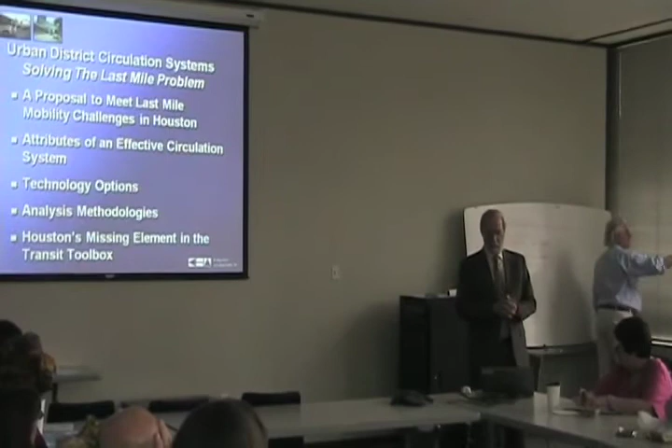Thank you, David. As you said, I've got way too much material, so I'm going to go fast, and I'll probably skip some stuff. When we first started talking, I sent him some technical papers I presented about some analytical work a few months ago, and asked if this is material they'd be interested in. He said, well, they probably would. Unfortunately, that's probably the stuff I'm going to skip today, because the other stuff I think is more important for this forum. If we have time, we'll see.

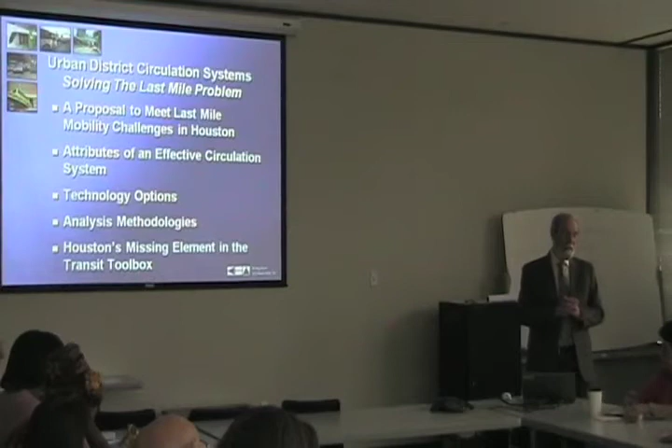David's going to be my timekeeper. But I'm going to talk through these things with regard to what we're calling the last-mile issue. Now let me warn you, those of you dealing with urban districts where the street system's working well and circulator buses are the solution—I'm not talking about that. I'm talking about the problem we have brewing that we're not addressing in our very dense urban districts. But we'll go through all that.

First of all, this is a proposal for this city in some of our most serious conditions, as I look out into the future.

We have urban districts in very close proximity to each other—this is Texas Medical Center and downtown in the distance—that are some of the densest in the country. And we are not thinking ahead enough on how we're going to move people around within those districts.

We are starting to think about how we get people to the districts in large quantities, but we're not yet thinking about how we move them around within the districts. In fact, in basically a 4-mile radius, we have 4 major business districts, and each of these, if they were a central business district, would rank in the top 15 in the country. We have 4 of them within a 4-mile radius of each other.

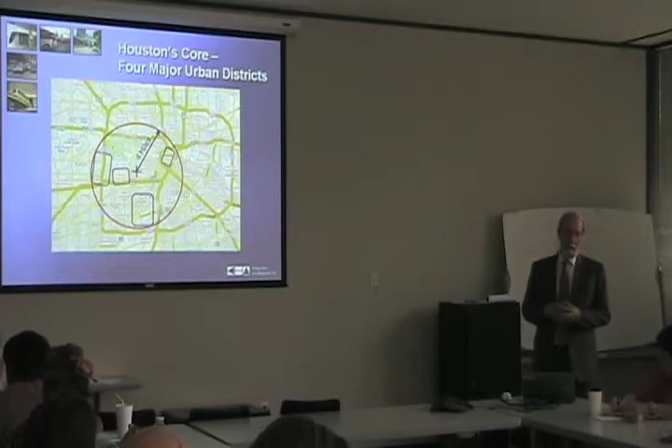Even the parts that are brand new. I know because I live right here, and the parts we just finished rebuilding, at peak hours we're already back at level of service F, cascaded all the way back through the system. And that surrounds these urban districts.

We must use transit to even get people to those districts, and we are taking some baby steps towards that. Some of the rail technology being discussed—long-distance commuter rail that would bring large trains into the core of the city—has a lot of issues and unsolved problems in how to do that.

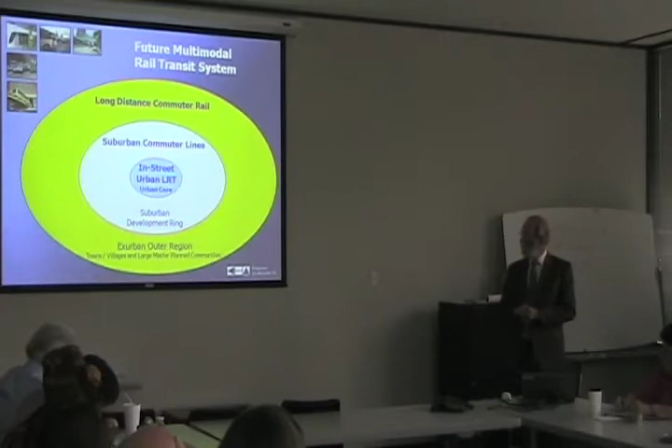Suburban commuter lines—Metro is now talking much more openly about extending light rail systems, or light rail type systems, on rail lines out from the city. And then we have the beginnings, and we're starting to design the additional lines for our in-street urban light rail system. But all of these are only part of the answer.

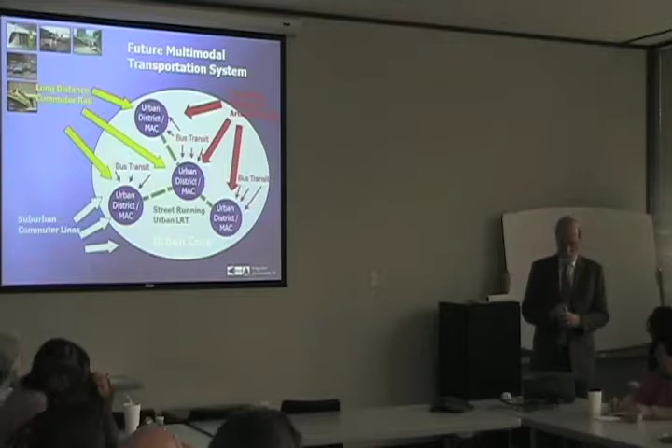Because as these systems bring people into the urban core, and as they begin to have access to the urban districts, or at least close proximity to them, it doesn't solve the issues about how you move people around inside.

There will be a new dynamic when things like long-distance commuter rail with large trains start to operate, because there will be a large quantity of people getting off those trains. Once our system matures over a number of years, I believe we're going to have locations where multiple trains arrive within a few minutes of each other, coming from different parts of the city.

And how we move people inside the urban districts is going to be a huge challenge. In addition, as parking becomes more complicated, as pricing goes up, as the value of property increases, and there's more thought about better ways to use that land than maybe parking structures, perimeter parking around urban districts is going to become, I believe, part of the solution.

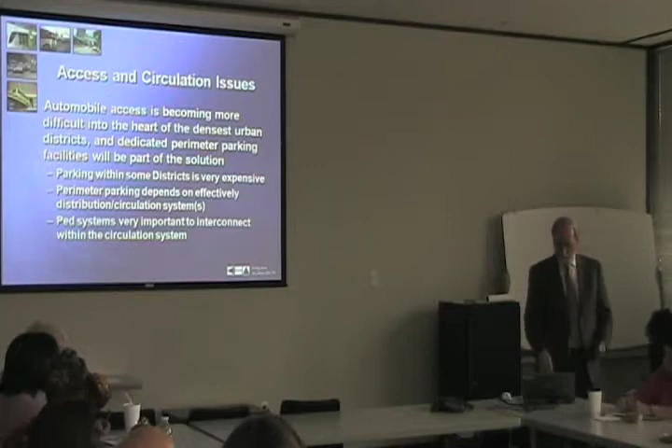And how you move people from those perimeter parking areas to the core is a critical part.

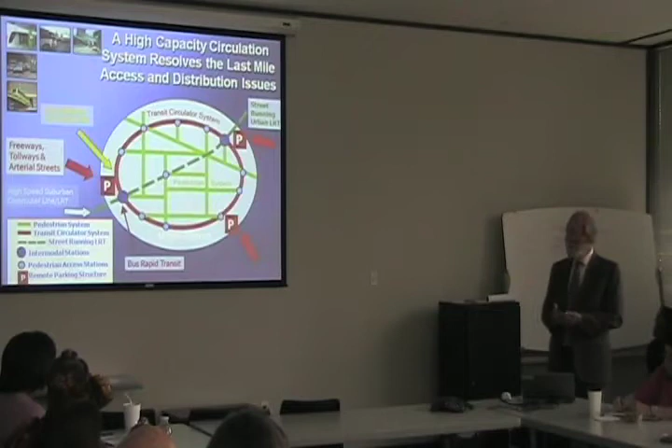You have light rail systems that might go through the middle, some bringing people long distances so the trains are already full when they get to the urban district. You have bus rapid transit, which is going to become a new part of our portfolio. And then I believe what's missing is we haven't yet addressed the circulation systems internally that can be complementary to the pedestrian systems.

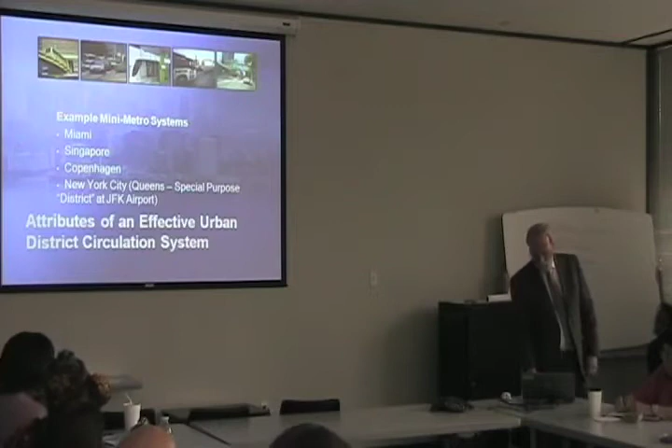Let me show you some examples of what I'm talking about. These are systems that in prior presentations, like the Metro Technology Forum, I call mini metro systems—I'll explain why as we go through. It is a fully automated, driverless system, and there's a reason for that. It can be used either in corridor service or circulator service in urban districts.

It generally has a moderate capacity range on the scale I'm talking about of 10 to 15,000 people per hour per direction, which is freeway equivalency. And it's very flexible in its alignment.

It has a smaller envelope, it handles steeper grades, turning radius, and the like. The propulsion and suspension systems can be just about anything, and I'll show you some examples. They might be rubber tire, like the Paris Metro, or they might be steel wheel.

The vehicles are smaller. They operate in short trains, often as close as 1-minute headways. The reason you can do that cost effectively is when you're fully automated, you don't have a driver on every train. So you can carry just as many people by running short, small trains on close headways. But that dramatically reduces the civil cost of your stations and your guideway structures.

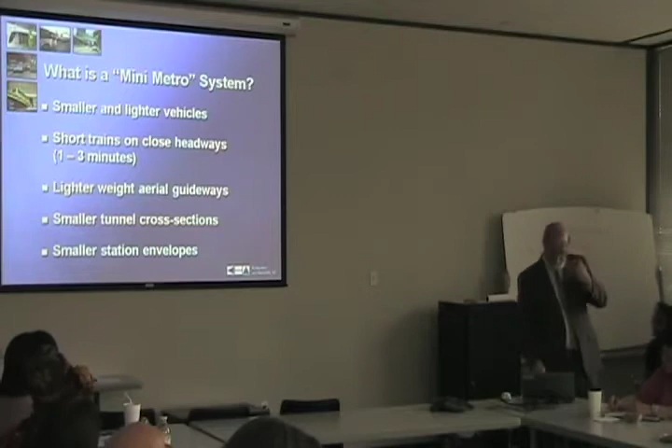Let me show you some examples. Miami, 20-plus years ago, when the federal government was investing in advanced technology—they haven't really since, although there's inklings of it again—this was one of the few systems that was built. It's in downtown Miami, and in '94 there were some extensions to the line that I worked on, so I became more familiar with it.

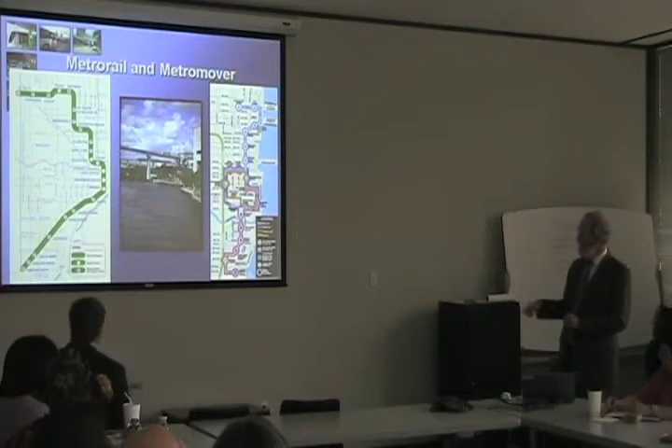Here is the Metro rail system on the left that goes out some distance. There's considerable work underway to look at expanding that. On the right is a graphic showing the central loop of downtown, which was the original one, and then the northern extension, generally called the Omni extension because of what was the Omni Mall up towards the north end, and then the Brickell district going to the south, now generally called the financial district.

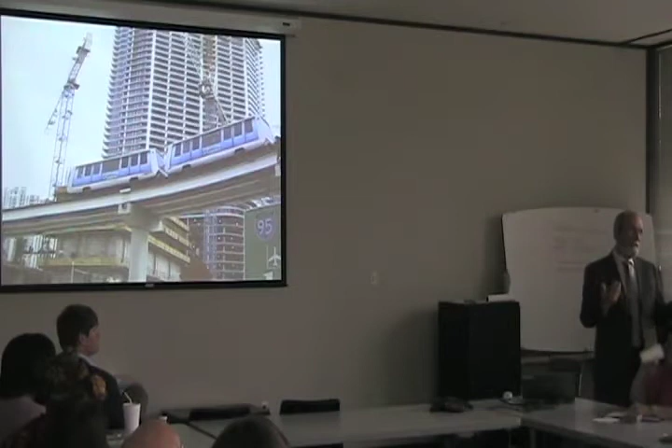I'll show you some examples of how that is developing. In fact, when I was there a year or so ago, I took my camera, and it's amazing the development and construction that's happening around the system in downtown Miami. There's been a lot of talk about the new urban energy happening in downtown Miami. Here's another shot of the system with all kinds of skyrise development going on around it.

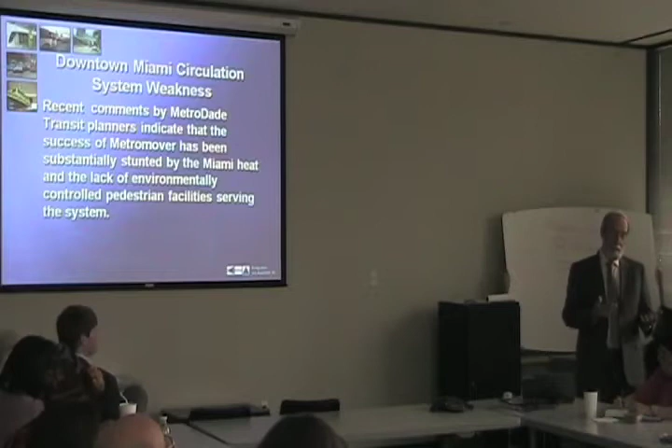This is just restating what I said. The one problem that's been noted, as I've been asking my associates in Miami to stay in touch with Miami-Dade Transit, is that they don't have environmentally protected ways in Miami's climate like Houston does to move around. So that's one of their weaknesses.

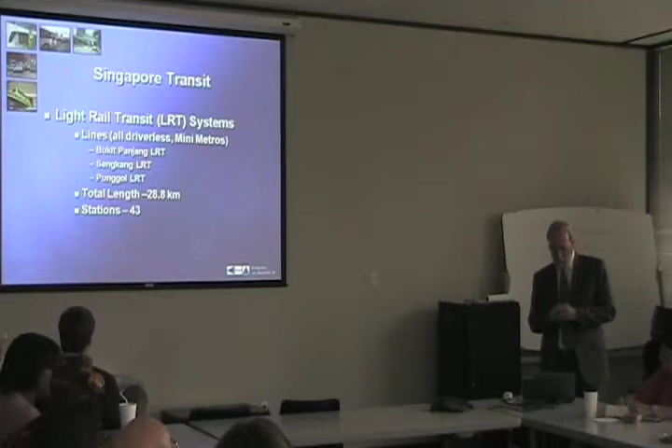The three lines I'm referring to are three different districts that have what they call light rail systems, but they are fully automated, in my term, mini metro systems. And there are, as you can see, quite a length and a number of stations.

You do not need a car to live in Singapore. It is a city that's been built for that purpose. They've integrated all of this circulation system into the urban context. It provides you the ability to get around and connect to all the other transit modes.

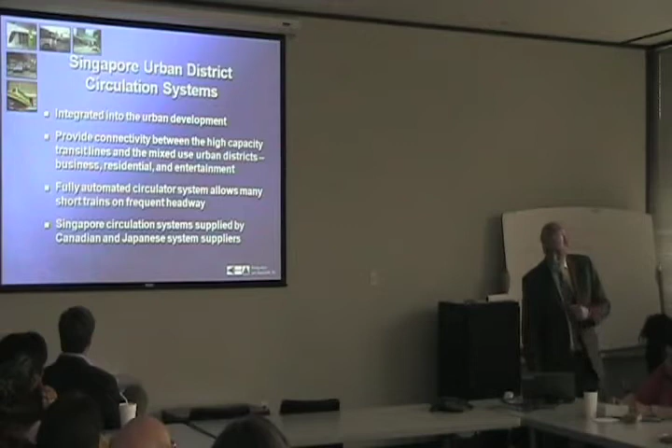Currently, the two suppliers that have been active there, I believe, are just Bombardier and Mitsubishi. This is a Mitsubishi car in one of those urban districts. They call it the Crystal Mover.

There are now several Crystal Mover systems going in here in the U.S., mostly in airports, only in airports at this point. But it's an attractive car. It's running in one-car trains here. Here's another view.

This is a seismic zone. Obviously, guideway structures get bigger. There are ways - Steve Clark over there has associates in his firm that have really developed a lot of expertise in how to compact the mass of guideways by integrating some of the structural elements a little differently than they did here. But it is integrated with the urban system.

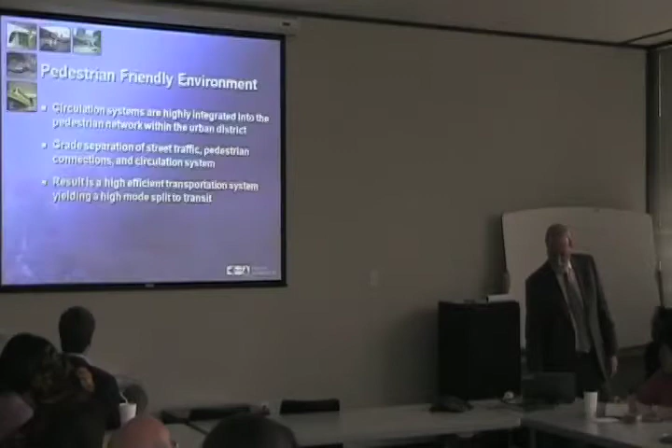It also has pedestrian-friendly characteristics. Circulation systems need to be integrated with pedestrian facilities, because it's the pedestrian facilities that really get you the last, if not the last mile, the last few hundred yards. Usually in environments like ours, which is the focus, there needs to be consideration of how those pedestrian systems can be grade separated in some of the densest areas, and also weather protected as much as possible.

Another case study that's very intriguing is in Copenhagen. This was not a compact urban district where there is, you might say, a circular circulation system, but it was a linear urban district that was created around the transit system.

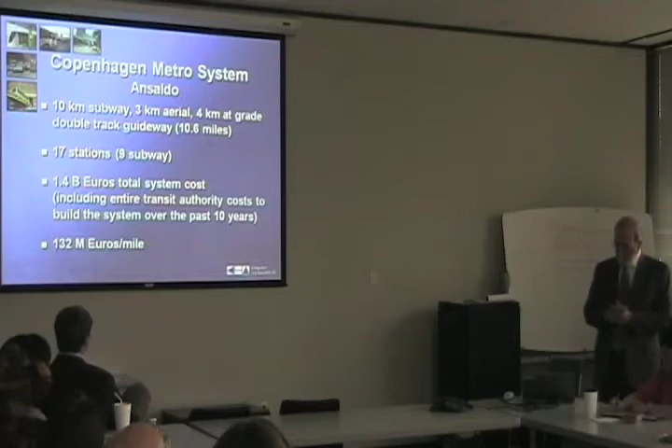In fact, the creation of this urban district was what fueled the funding to build the system. They created a company, and for many years, the transit authority was this company.

Here you can see a shot from one of the stations. They built the system before most of the stuff was there. And here is the view looking out into the open land.

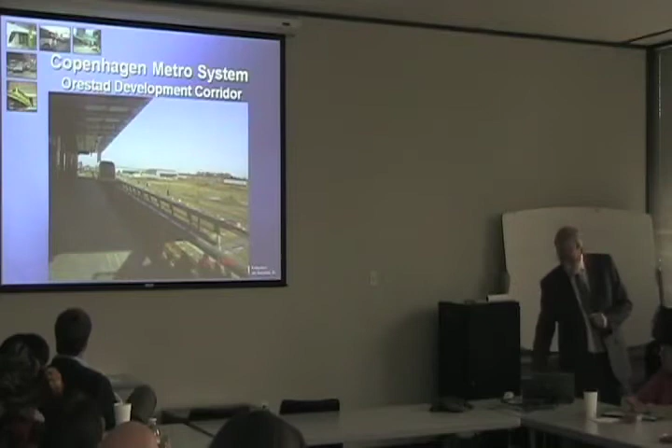Some of it was in place. On the left there was a big department store, shopping mall. On the right you can see there's a lot of open land under construction, and there's actually a station here somewhere right in here, I believe, is the station.

Again, more shots of the open land. The stations are small and compact because the trains are small. And you can do that with fully automated systems.

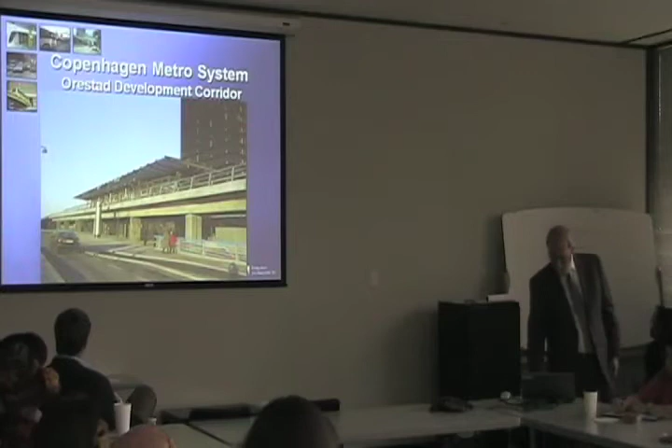This particular design is a nice design by Ansaldo. It's a rail car, pretty conventional rail car, but it's a walkthrough. And I was very impressed by the technology that was applied.

Another shot of one of the stations. This is one of the subway elements. As they get into the old town, out of this corridor I'm talking about, they go subway because of all of the very, very old buildings there. And these are some of the smallest subway stations I have ever seen.

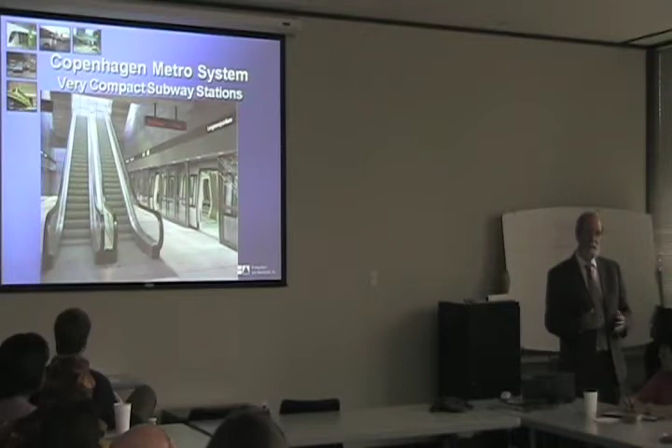But that translates into many dollars saved.

Another one that some of you may be more familiar with because it's in New York is what I call the Airport District Circulator System, or as the Port Authority calls it, the air train. That is the JFK AirTrain as compared to the Newark air train.

This is a rail car built by Bombardier. There are a number of systems around the world and they're marketing it aggressively. It's actually a linear induction motor propulsion, which means it doesn't have to worry about traction between the steel wheels and the steel rails, but they can do conventional switching and things like that. A very impressive system. It doesn't carry a whole lot of riders, but it was still a fundamentally important investment for the Port Authority to make.

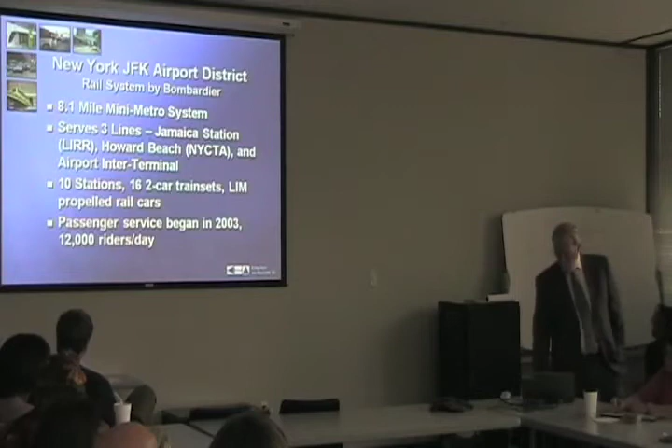Now it's over 8 miles long. The reason is because it stretches all the way out to Jamaica Station, which is the main intermodal connection point for Long Island Railroad. It's also served by a New York City Transit Authority subway. The other branch of the line goes over to Howard Beach, and there is a transit line over there that connects in with the metro system in New York City. This particular line connects those and also carries people to various facilities on the land side and interconnection between the airside terminals.

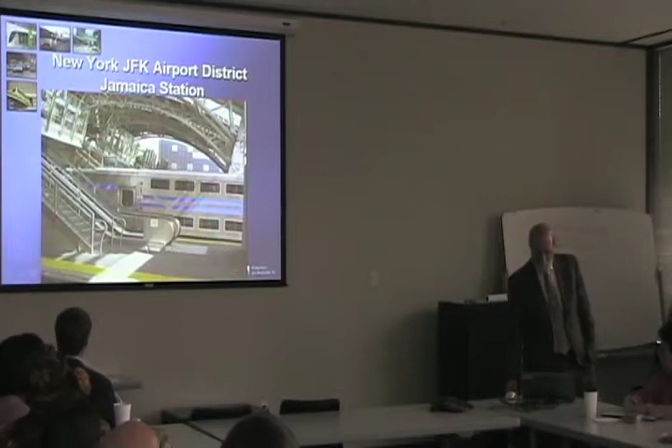Another shot of this train as it's sitting in one of the stations. Now, if we were to be coming from Manhattan to go to JFK, we would arrive on a commuter rail train like this in a newly refurbished Jamaica Station. The Port Authority took the lead in rebuilding that station, very nice architecturally. You go up escalators to this concourse, walk across all of the platforms, of which there are many at that station, down a hallway to connect to the JFK AirTrain.

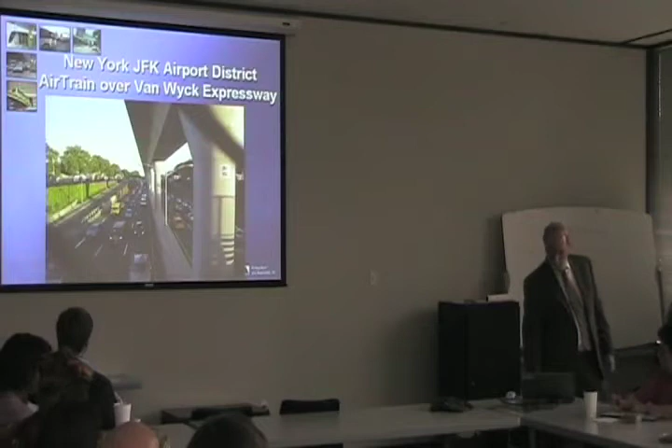When we get on that train, we would travel down the middle of the Van Wyck Expressway. This is the very reason why they built this train, because that expressway doesn't look anything like that most of the time. There was no way to get people effectively from the main hub of the transportation system at Jamaica Station into Kennedy Airport, and getting there by car was an incredible nightmare. We will get there someday. We're not to that point yet.

What about pedestrian connections? Making pretty good time, David. I think we'll be okay.

Pedestrian-friendly environment. I was trying to remember, David, what the guy that spoke on pedestrian stuff a few months ago used, but he had rankings of friendliness for pedestrians. Yeah, I couldn't remember to put them in there.

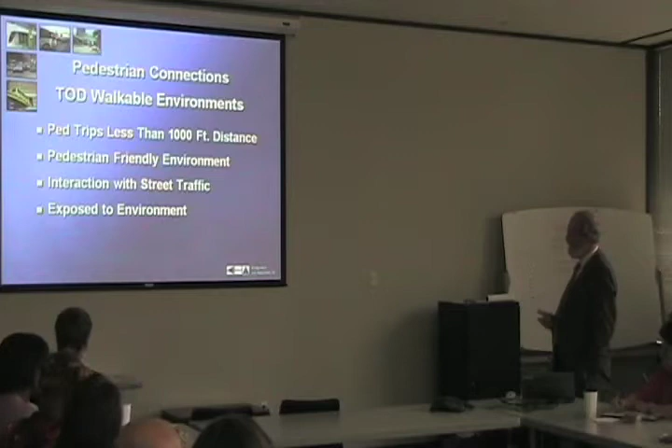But here you're involved with interaction with street traffic. You're exposed to the environment. It can be a testy environment at times. We have some nice conditions of this downtown. I didn't have a photo that shows all the restaurants and stuff, which would have been better. But there are some nice pedestrian facilities along our light rail system in downtown, as an example.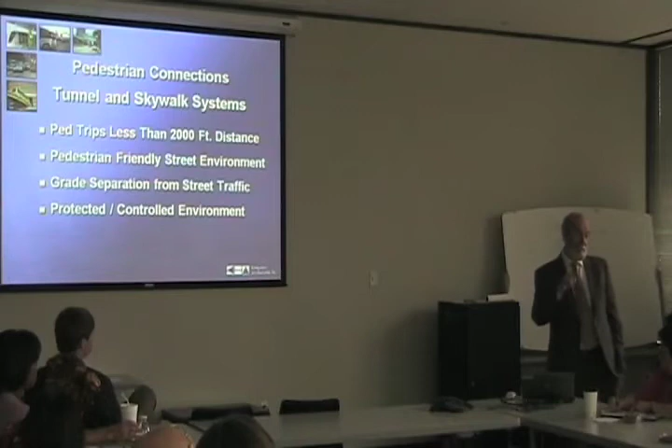But then you can go to the next level, which is tunnel and skywalk systems. We're very familiar with that in Houston. Generally, I still think pedestrian trips, most of us would be reluctant to go much more than half a mile, maybe if we needed to, but usually this type of system isn't well suited for going much further than that. Grade separation from street traffic is a huge plus, and protection from inclement weather, a controlled environment, is another huge plus. In our urban districts, the densest ones, over time that's going to be absolutely essential.

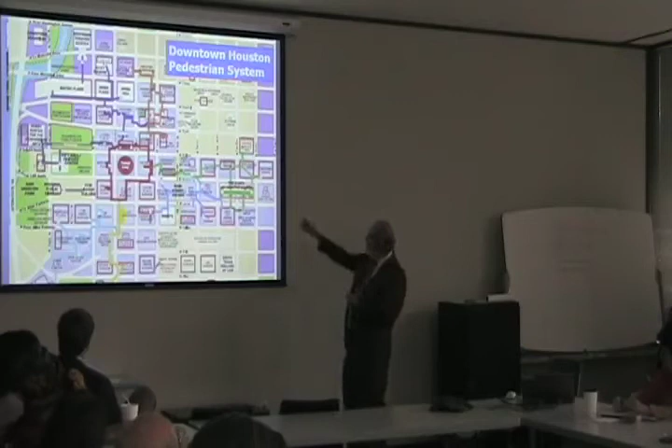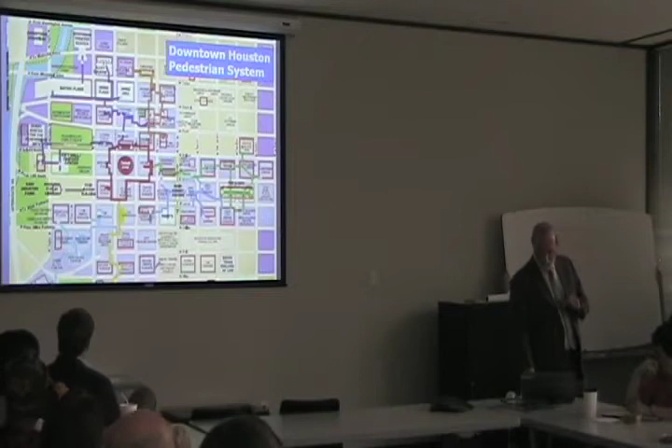This is downtown Houston. You can see in the color coding, if you haven't seen this before, this is impressive. There's quite a network of underground and some above-ground pedestrian connections. But I dare say very few people would choose to go from Houston Center over to Allen Center via that network, because it's a long way and not a straight shot. But it works, it works very well. Unless you've worked downtown, myself included, I don't really understand it - I get lost very easily. But it's an important element. This is the kind of thing that can bring to completion what we need to do.

Now there's another element that I think can take us to the next level. It's brand new - Steve's nodding his head over there because his company is working with some of the suppliers on this guideway design. It's generally called personal rapid transit. For 30 years we've talked about it. If this were a room full of hardcore transit engineers, you'd all be rolling your eyes because you've heard about this for 30 years and it hasn't happened. But there are currently 3 developers with real hardware that's either in implementation now in projects or in full test track mode, and this will be real very soon.

One system within a few months. What it is, is a small personal-size system, at least in pure concept of PRT, where you get on board - it's your vehicle - and it goes from where you got on, you tell it where you want to go, and it doesn't stop until it gets to your station. Very convenient - it's basically a fully automated taxi.

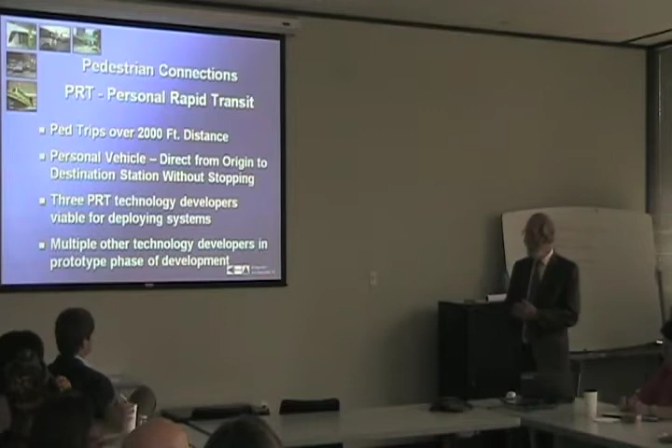And there are multiple other developers working now. In fact, there was a fellow from Austin that called me the other day - did he make it? He was saying he might come. That has at least a PRT-like development he's working on. His or all of them? All of them are fully automated.

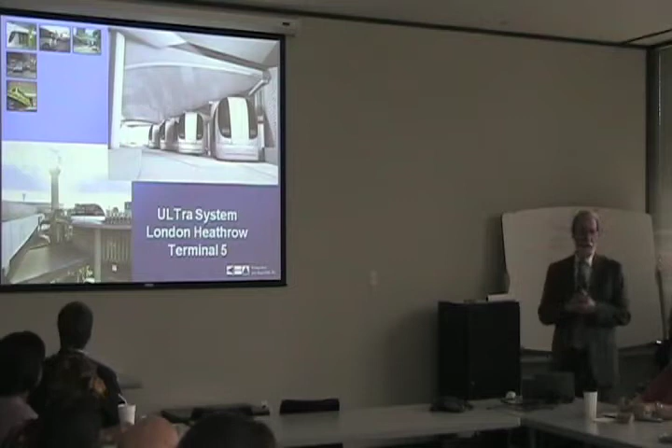Here's one called ULTra, built by a company called ATS - I think that's Advanced Transport Systems Limited, based in Bristol, England. Note that the vehicles are very small, therefore the guideways are very light. In fact, that particular guideway is on their test track, and I think they erected multiple spans in a few hours or something like that. The erection at their first project, Heathrow Airport, was also very quick. You can see the guideway on the left there. It's actually a retrofit, because the airport was designed and the structures substantially built when they decided to put the ULTra system in. So they've actually taken one level of the parking garage and converted it into the station at the terminal - that's very interesting. We'll all be watching closely - you'll probably see news reports over the next few months as they come online, if you haven't already.

Analysis methodologies. If you're not asleep, this may put you there, but there are a few of you that may be interested in the room.

When you're dealing with multimodal elements in a dense urban environment, you have to be able to analyze all the modes and their interaction with each other together. For example, these are some of the types of systems, facilities, or modes that need to be understood and addressed if you're going to be designing how to bring all these different technologies and modes together.

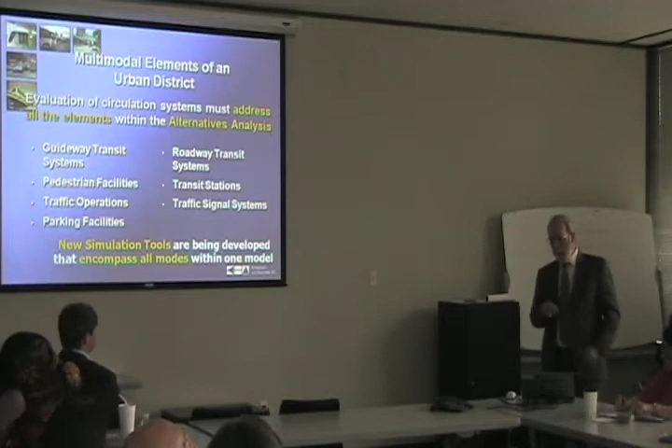We have been developing simulation tools. There's a little bit of an advertisement here. I'm sorry, it's just that I'm going to talk about our methodology a little bit.

Part of what you have to be able to do is study the choices people make within an urban district. In the region, we have huge models used to estimate mode split, as it's called—how many people choose to ride a train versus drive on the freeway. Within an urban district, it gets a lot more complicated, because things like how far you have to walk, how many level changes you have to make, how long you have to wait for the train, how much it costs to park in this location versus that location are all aspects you consider when deciding whether to get my car out of parking and drive across downtown to lunch or a meeting, or walk through the tunnel system all the way there, or go downstairs and get up to that fancy new automated system they just built and ride it around to the other side.

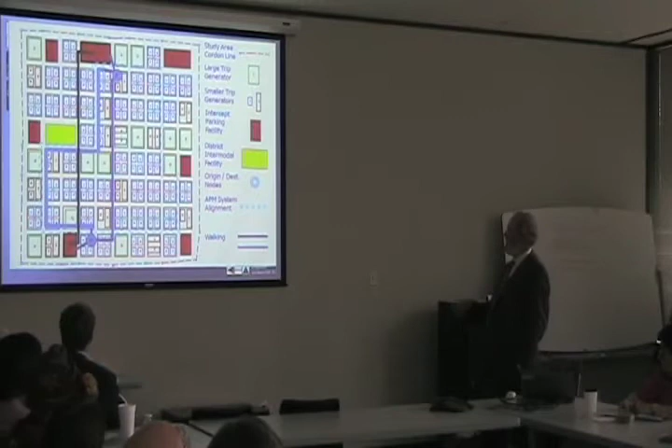This is a marginal graphic—I do some of these on my own, so it's not very good, but it shows some competing path choices. The purple represents what if I walked across downtown. The black is what if I got my car out of parking and drove over there. And the blue is what if I got on the new Circulator system and rode around several station stops to get off. You have to be able to analyze these types of competing paths and do appropriate modal choice.

Our software is called ALTPS, the Advanced Land Transportation Performance Simulation. We built it around this approach because we are preparing ourselves to do this kind of job in our planning and engineering. For example, in a given model—this is a very old one we did years ago at Texas Medical Center—it shows that in a given trip assignment, a path assignment, there's an automobile component, a parking component that may have a cost associated with it, a transit component, and a pedestrian component, all of which have to be embraced as you study this type of dense environment.

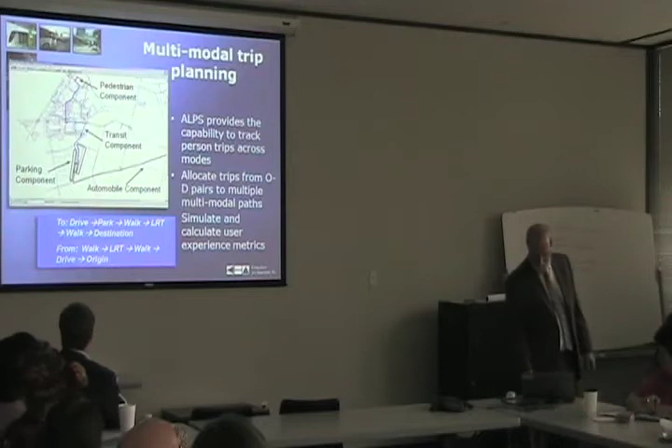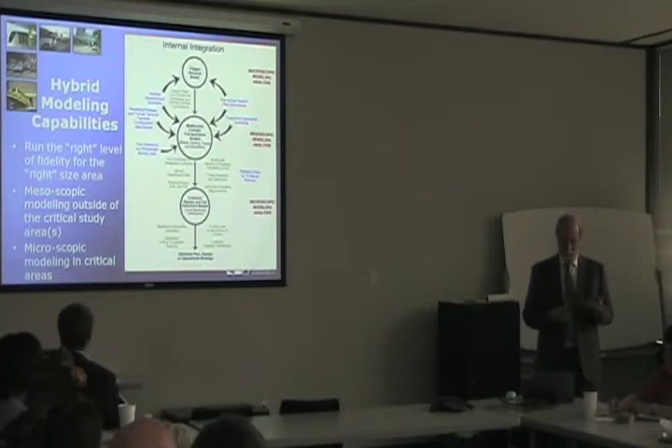I'm not going to go into what macroscopic, mesoscopic, and microscopic means. Some of you know, because HGAC, the guys on this floor, are trying to embrace some of that. But there's great usefulness in being able to use all of those different elements in the analytical process. What we're developing that I'm excited about is we're able to do hybrids, where part of the model runs in one type of processing and part in another. But that's getting too geeky, so I'm going to stop.

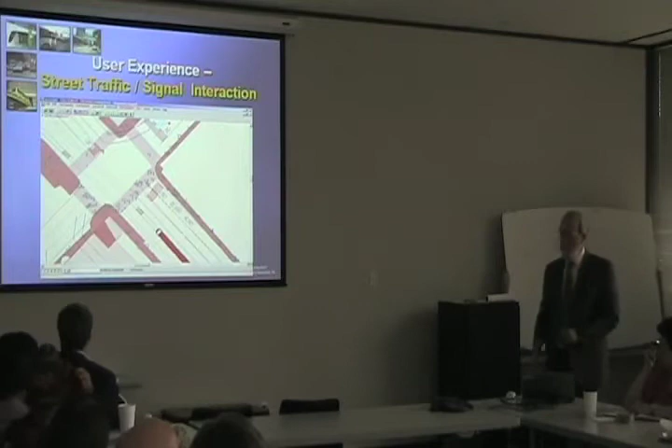Just some still shots from a couple of models recently. This happens to be a model of downtown—not downtown Houston, I didn't use that one. This is downtown Minneapolis, where we were studying the planning of a new baseball stadium in the middle of downtown and the extension of the light rail system to service that. We were looking at the interaction between cars, people, and trains in downtown Minneapolis.

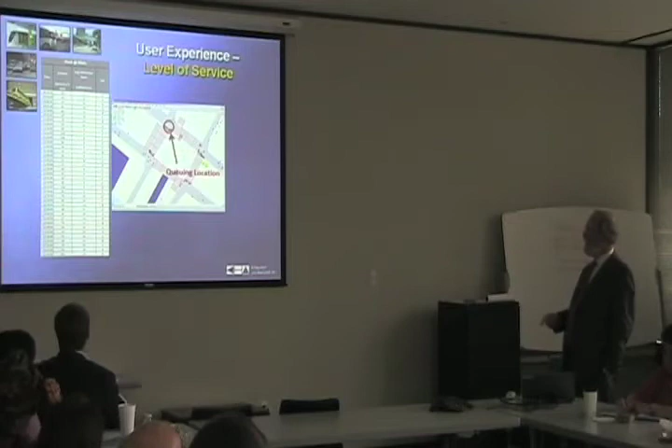What you're able to do when you simulate the whole environment is look in great detail at demand conditions, flow rates, and occupancies. This happens to be a pedestrian segment. You can look at even levels of service conditions in small time increments, down to the point of the intersection where people are ganging up waiting for the light to change so they can go across. That can be really important in your decisions on how you get across to the other side of the urban district.

And we embrace a whole 24-hour period, because the off-peak times are as important in many ways as the peak times, particularly with some of the technologies applied. We call it holistic.

That rings a bell more in California than it does here, but it's a holistic analysis approach, and it includes functional, performance, and operational types of analysis.

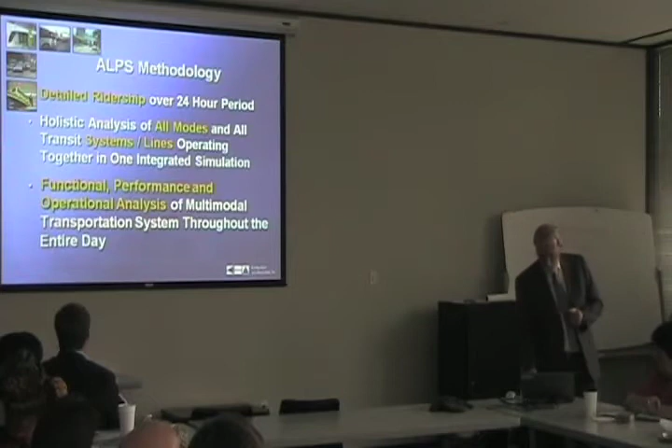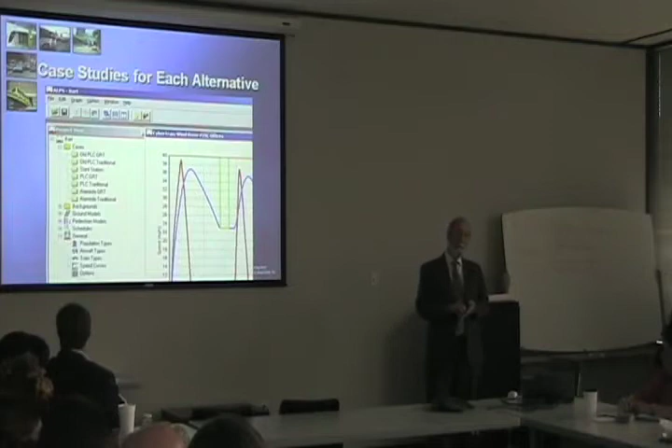In these models, we build the guideway systems, vehicle performance characteristics, and control systems. We can use this model to do a number of case studies. Regarding general urban districts, the case studies might include testing a manually operated bus circulator system, a new sky bridge system, a light rail loop or streetcar loop, versus an automated mini metro system. You can test all of those modes as alternatives with the exact same demand conditions, and they'll all have different pedestrian connection aspects, but you get an apples-to-apples comparison, with graphs, charts, tables, and everything else. So that's my little bit of analytical stuff.

I apologize if it seems a little commercial. Where does that leave us? With time, we're doing pretty good. What are we missing?

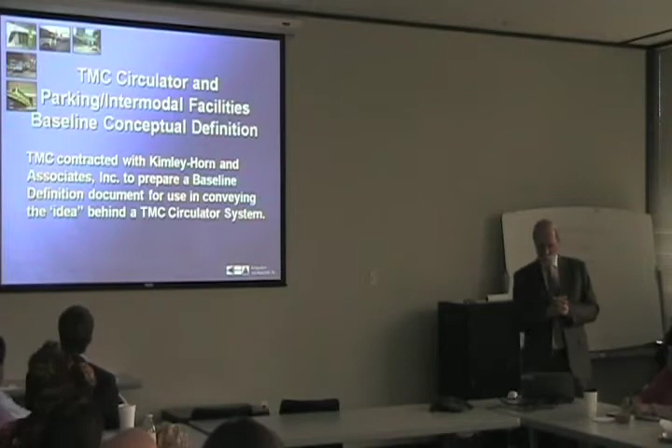Let me show you an example of what I think we're missing. We did a pure top-level concept study of Texas Medical Center a few years ago, to look at just defining the idea of a circulator system for Texas Medical Center.

And they have to move people back and forth between those two campuses. Actually, there's a whole other campus in the middle where their facilities aren't yet, called the mid-campus, where a lot of things are starting to come out of the ground.

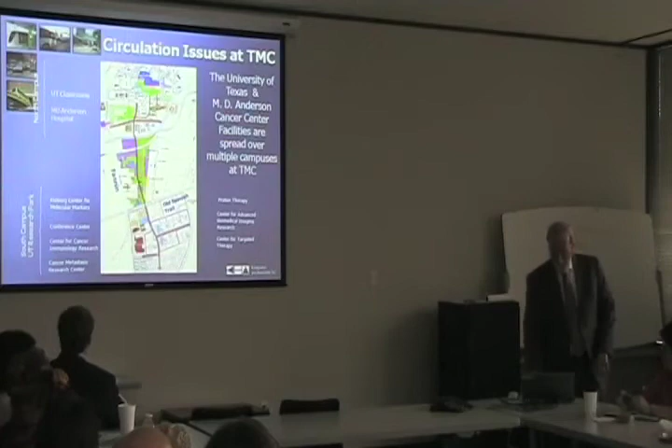How do you deal with this circulation issue? They've already built remote parking facilities of substantial scale. Some are served by the light rail system, and it fills to capacity. Some are being served by busing operations, but they need to continue looking at how to build more remote parking facilities and move people around. In fact, many, if not most, of the institutions are already running their own bus shuttles from all these facilities too. That's a big question—how do we deal with that?

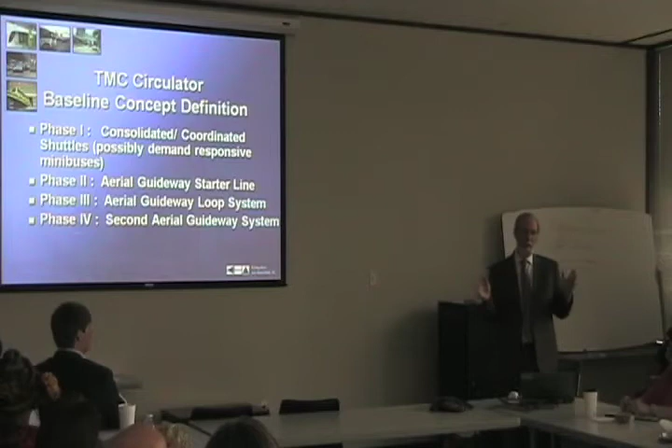We did a period of a few weeks with some workshops, developed some concept ideas, and this was what was left at the end of that brief study. There was more to come, and there may still be more to come, but it hasn't happened in the immediate past. Phase one: how can we make all these buses work together?

They're in the process of thinking about that right now—how do we do a consolidated busing operation? Phase two, you start to build aerial guideway circulator systems in pieces. Graphically, what does that look like?

For example, here would be a parking intermodal facility with buses pulling up next to it. They're probably going to have to start going higher density and stack their parking because the value of land is so important to them out there.

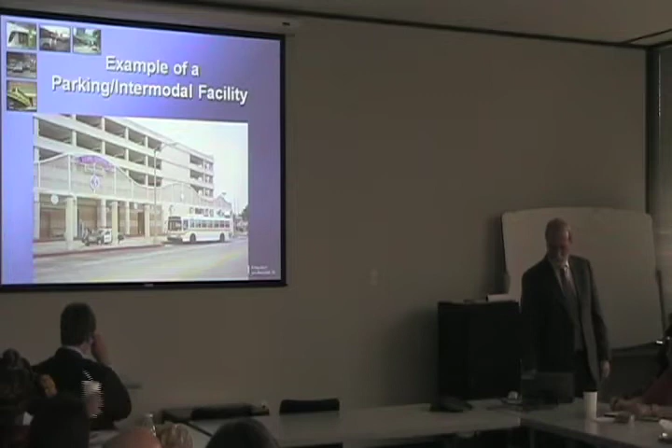But then, in a later phase, you could build the initial piece. Since MD Anderson is driving a lot of the concerns, the first piece that we conceptualized, and MD Anderson helped pay for part of the study, so obviously we would think about that.

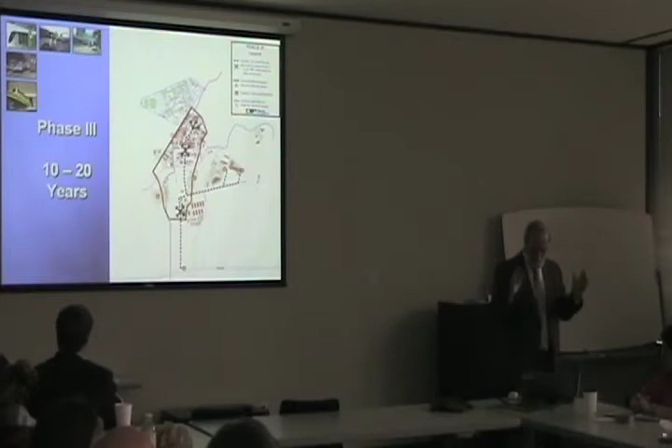Is a connector between the south campus and the north campus. But you can see dotted lines there of other parts of the circulator. And as you go out in future years, the next thing you might do is close in the first circulator loop. What I was thinking about, Metro correctly pointed out, that concept didn't go to the intermodal bus terminal and light rail terminal there, but it was just intended to be a concept, so I apologize. In the real alignment studies, that would be fixed.

And then, as that mid-campus area develops, you would begin to build pieces of another loop that could, in fact, connect people along that. Would it look like this? No. Would a little bit of engineering change all of this? Yes. But is it a concept? That's what I'm telling you about.

It's a concept. Now, the important thing is that where that guideway goes for a higher capacity system that I think needs to be planned for is the backbone. You can't just run it down the middle between all the hospitals necessarily. That may not be possible.

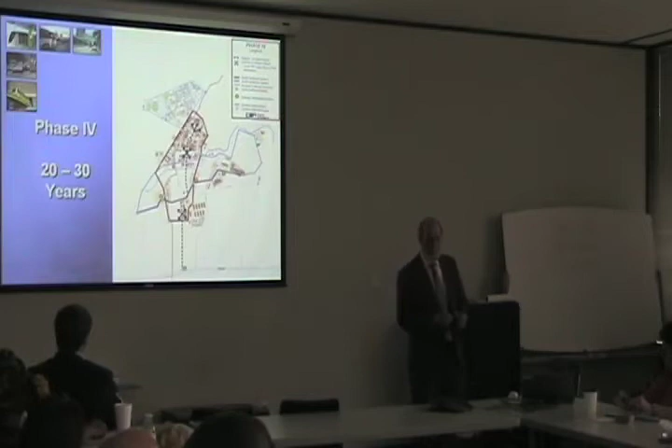So what probably is practical is to ring the level of development that's there now, or at least do enough design to preserve the right-of-way, so that in the years to come, when money becomes available, because it's obviously not now, as it makes sense to make those investments, you've protected a place for it to go. That's really the message. We have to begin to think ahead and protect the places for it to go.

And then there comes the day when maybe we can connect some really high capacity system like commuter rail into that system, so that people really can get from Rosenberg to the Methodist Hospital and do it without a car. This graphic was one we used in the HGAC study.

So what are the conclusions? Over the next 20 to 30 years, we recommended that mobility will be determined to a great extent by how they plan ahead for a dedicated circulator system.

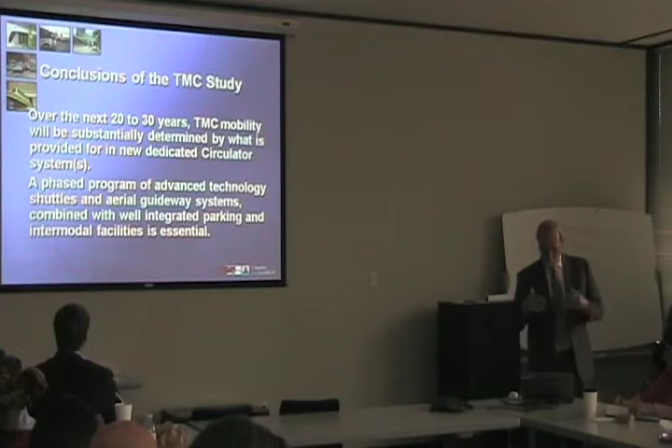The same is true for downtown Houston, and even though it's not so dense now, the same is true for uptown Galleria and Greenway Plaza. If we don't begin to plan now and preserve rights-of-way and know what we're going to do, it's going to be either a lot more expensive or impossible to get it done. And a phased program that can move through technology developments as it occurs is an important part of that.

So, my final point, we have to begin planning. Why didn't it spell very good? I'm sorry, this all came together very quickly.

We have begun planning for a future multimodal transit system for Houston. It needs to include local bus routes, light rail transit, bus rapid transit, suburban commuter lines like Metro's planning, and long-distance commuter rail. Guess what? We're already thinking about all of those.

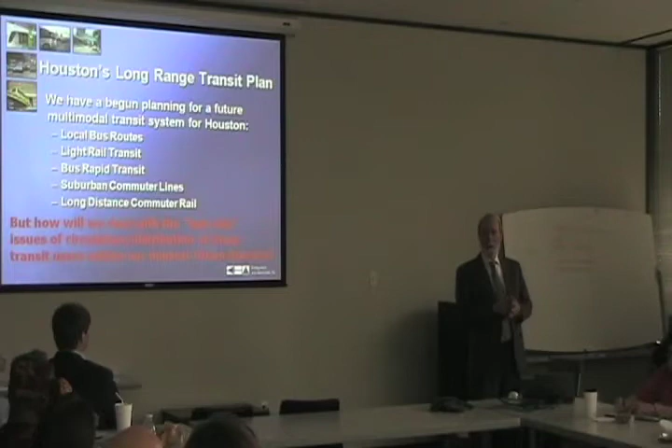But what we're not thinking about is how to make that last mile connection for large quantities of people from either rail stations or remote parking facilities or the expanding density of urban districts, and move them around in a way that's efficient, comfortable, safe, and cost-effective. These are very expensive systems relative to even the light rail system we're building. But they are part of the solution that the rest of the world is seeing needs to be invested in.

The last point is about full automation. As we think about how we might connect all of this, a presentation a few months ago noted Siemens is one of the companies that's very active in full automation, and I'm active in an international committee of people from around the world that work with fully automated transit systems. They tell me that in Europe, if I got this right from this presentation, the last 10 new starts, where it's a new system, have been fully automated systems, generally of this mini metro class.

Think about that. Now they have trams, as they call it, everywhere, but the new systems they're building are the fully automated systems because their operations and maintenance is very cost effective. They can build smaller, lighter, fixed facilities, and they can run them safer and more cost effectively than systems operated by humans.

As we look at this part of town that's going to become the densest part of our core, and we have these major urban districts already there, our long-term solution needs these circulator systems.

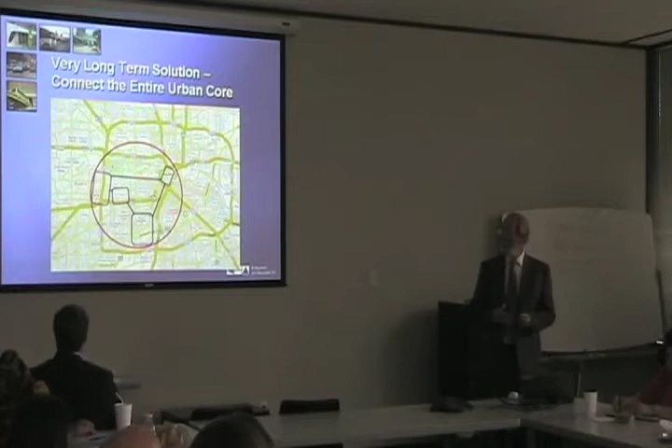As my last slide, a few minutes before I came over here, I thought: what if we let those represent the circulator systems? Over the very long haul, you could even connect them. I'm not saying we don't need to do what we're doing right now—Metro is doing the right things. But the light rail system won't be able to carry the load that will move within that circle as this part of town becomes very dense over the long haul. So there has to be other systems. One way is to start with mini metro applications in the urban districts and ultimately interconnect them. That would be a good supplement to what we're already studying. So that's the thought.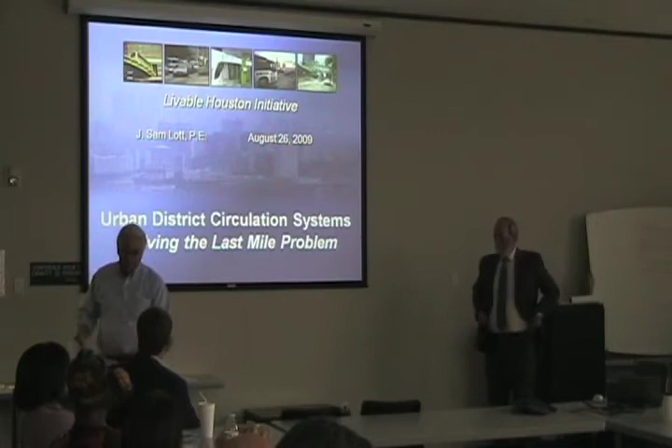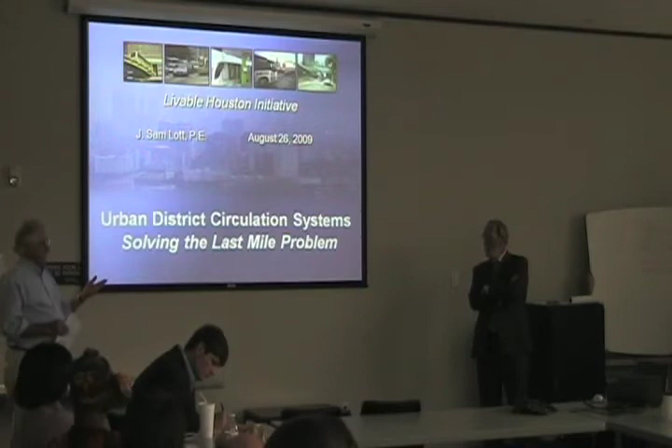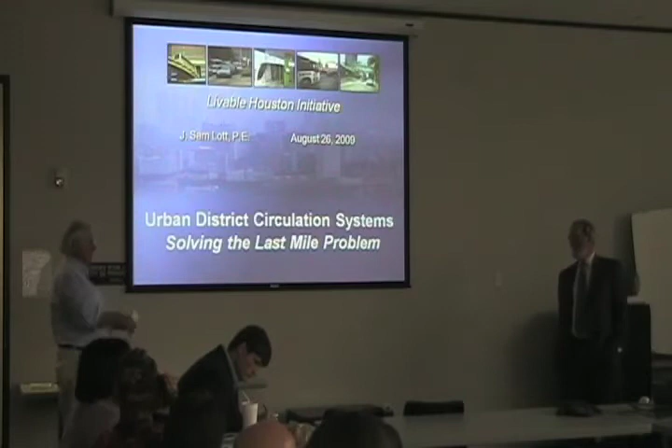So I have a question. You showed me once some really interesting stuff about Los Angeles Union Station, about the problem when 1,000 people arrive at a station to get off a train, and then a minute later another train arrives—your model talks about that. It's fascinating to watch. But what are the issues involved, and will we be confronting this as we begin to bring commuter rail together with light rail? So, just moving the people off the train.

One of the things that came up at the end of the commuter rail study was the recommendation from the study team that a major operational hub be pursued. The site we recommended is along the West Loop. That site, captured now before development overwhelms it, would allow us to operate a regional commuter rail system and intercity trains, connecting well into the rest of the modal system—I won't go into that, since I talked about it a year ago when I was here. But when we do that, we'll have to move large quantities of people out of that site.

There will likewise be a large, prominent modal station in or for downtown Houston, with large quantities of people coming in when multiple trains arrive, and you have to move them. You can either stage 15 or 20 buses somewhere—which you may need anyway just to get them into downtown—or you can do like LA Union Station did and build a high-capacity subway underneath the rail terminal that can carry 20 or 30,000 people an hour into downtown. I don't propose that; we made that choice 25 years ago when we killed the first system, which was going to be 80% federally funded, and we didn't build a subway through downtown. The option is to create smaller-scale systems that, complementary with the other systems there, can move significantly large quantities of people. That is exactly the problem I foresee: if we don't start planning now for the facilities and systems, we won't be able to catch up.

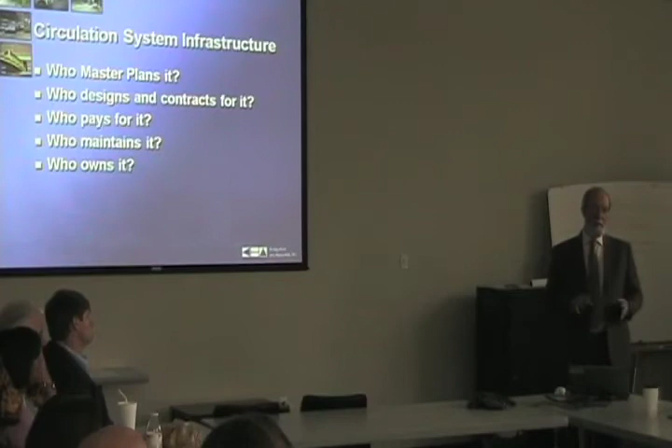Well, actually, I had this slide here, the last slide, and I took it and moved it because there are a bunch of questions. We have developed this conglomerate of agencies and quasi-governmental entities that have their own territories, but everybody says, well, it's somebody else's job to do that part of it. And I don't know the answer. They are good questions.

The smaller scale systems, maybe it makes sense for the management district to own and operate that. At some point, Metro steps in and says, okay, that's big enough for me to take charge of that. I don't know the answers.

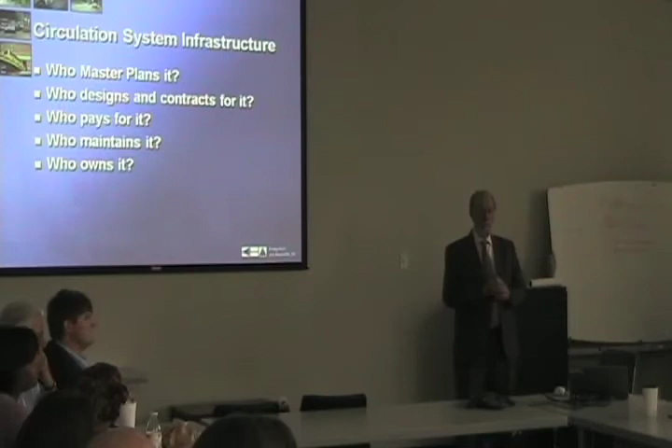Well, Sam, I'm sorry. The fragmentation that you just described is basically these solutions apply to 20th century world. We don't plan before we grow. We grow and then we try to fix it. So the concern that I have is whatever mode you choose to serve a particular problem, you either are serving pre-existing growth, which then attracts more growth, or you take it in an undeveloped area to spur growth, and it comes. So we never catch up.

I don't have a whole lot of confidence in the solutions because the real problem is, as David's been talking about for years, is you plan before you grow. You've got infrastructure, you've got water, you've got all these other needs aside from transportation. So consider a moratorium in Houston, Texas. Leave it on that note.

Sam, I'd submit that we haven't quite figured out the whole business model for transportation of people, and that if you look at the West Chase area, or well, let's step back. Let's look at Hong Kong, where MTRC, they use retail, commercial, and residential development as part of their business model, and in fact, that's what pays for it.

Or the Copenhagen model. Okay, yeah, and you take like West Chase or Greenway, where you have so many businesses, so many commercial entities that they could actually become a part of the partnership, if you will, of a concession, and whether they're direct or indirect benefits, that model exists out there in the world for them to become a partner of the transportation system, where the infrastructure, the really expensive part, is provided by the local government or governments, as it were. Right.

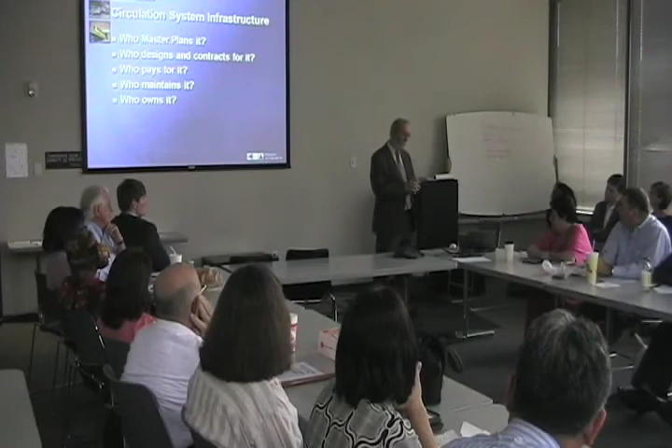To move the people - an interesting thing is that when we built all those tunnels downtown, all the retail went with it. If you build pedestrian systems above ground, like there are now in the center, the retail goes with it. So I don't see that it kills the retail, it's just that the retail may redistribute. And it's not like the whole urban district is aerial, it's just where the transit system goes.

We could do it as a subway. I'm not sure, after living here for 35 years, even as a transit engineer, that subways are the best solution. They are possible, and maybe in the end that's the only thing that makes sense. But I'm showing you examples of urban districts that tend to go with significantly lower cost aerial systems.

Sam, what we're finding in some of our projects around the world is that subways, or tunneling in urban districts, is actually much less environmentally disruptive - from a social justice perspective, from an economic perspective, the whole nine yards. In dense urban districts, it is more economical to go with a tunnel.

If you're cutting across - yes, one of the concepts I think we need to look at is if we preserve a right-of-way around the edge of the current development and protect it, then it wouldn't be as much impact.

Subway is possible. Occasionally you'd have to pump out all the water and repair everything, but it's possible - that's part of the engineering.

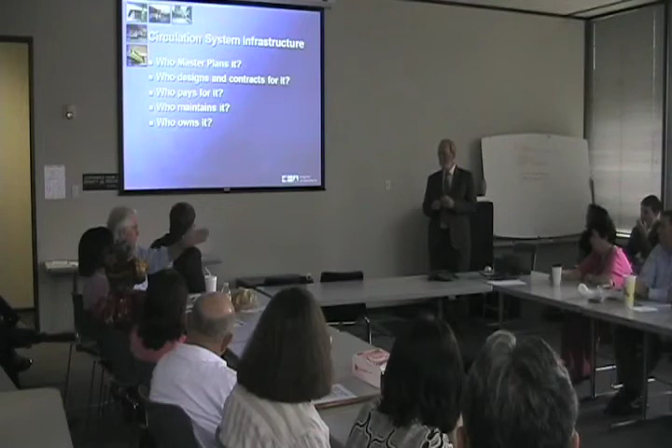You would never think of saying, okay, people can park a car in the middle of the freeway and get off somehow. You would take them somewhere, an off-ramp, go somewhere. You couldn't go right through a building—you've got escalators and all that. I think line haul systems down corridors make a lot more sense, but they probably need some way to distribute people from there to the surrounding urban areas.

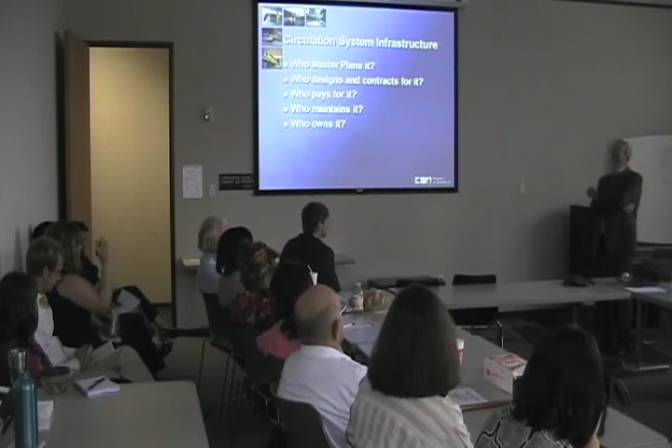Yes, ma'am. I don't remember where I read this, but it was a futuristic idea. If you visualize a regular train with cargo bays latched together—this was a concept where you took a train of commuter cars, like little mini smart cars, and ran them all through the same location. People could individually take their little cars wherever they wanted within that system, and once they're done, it would somehow get back via GPS to where it's supposed to go. So it's like a train composed of very small cars that could take you to the last mile more directly, and when you're done with it, you just drop it off—you don't have to go back to where you were. I thought it was an interesting concept.

The dual mode ideas are pretty strong. In fact, the fellow from Austin, I guess he's not here—I thought he was coming. It's a dual mode concept, where you drive your vehicle to a point where it gets on the guideway and then it runs automatically.

Not in my lifetime, and I'm not saying it's not a future possibility. I think there's going to be a lot of changes in this century, but I don't know if that one will ever come to fruition. One of the problems with taking a private vehicle that I own and putting it in an automated system is who's liable if something doesn't work right? Well, these are actually publicly owned cars. Yeah, you can just drop off and pick up another car. Most fully automated systems, the price of the controls is prohibitive, although some of the PRT suppliers say they're figuring out ways to bring it down, so we'll see.

Yes, sir. In the area of choices, you mentioned the I-10 newly reconstructed. They've got a toll road down the middle, and when the traffic is really backed up, people pay that toll and ride the toll road. But the minute the traffic drops off just a little bit, that toll road is almost empty. I think that's the way people think—unless you've got federal money to build something, they don't want to put their own money into the project. And Miami had the federal money. If you've got a congressman or senator who can get you federal money to build a project, you're in business. But without that federal money, people don't want to spend their own money for it.

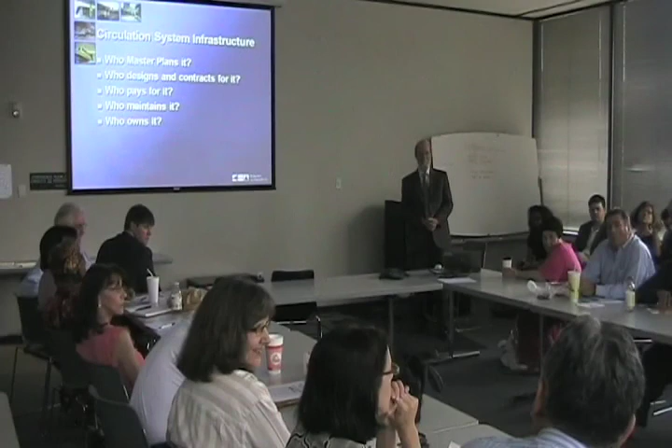Have you guys ever been to the Schlitterbahn in New Braunfels? They've got 3 different parks, buses, and tubes you can pick up from a big pile of tubes, all queued up ready for you to go. It's a similar concept—you pay to get into the intermodal system, scan your card on a shared card reader, and they just queue up for you. I remember someone telling me Walt Disney was the greatest transit designer, because people thought it was fun riding that monorail at Disney World, but it actually served the purpose of moving people and worked for 50 years.